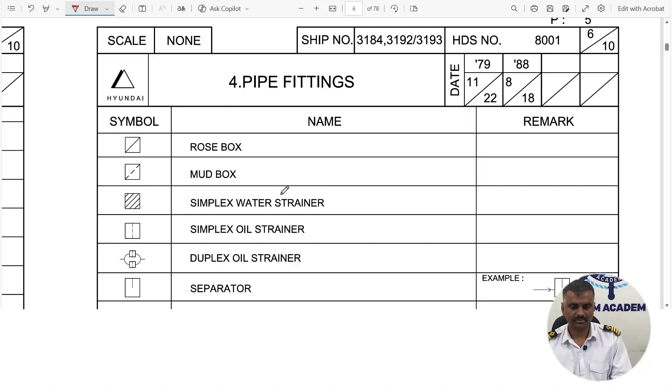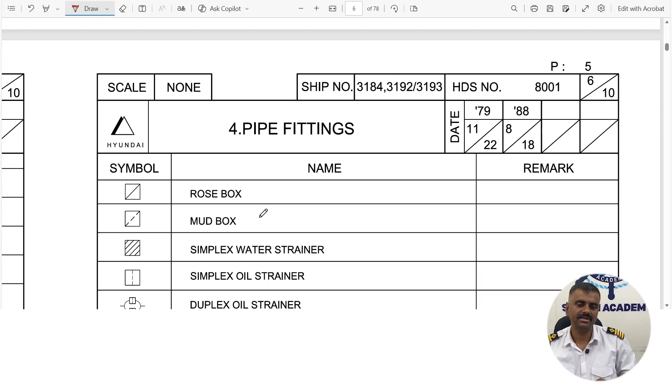So basically the purpose of these pipe fittings is, in the pipeline diagram there are separate fittings apart from the pipe, like you will have filter, you will have strainer, separator, hopper, orifice. These are fittings which enhance or increase the workability. So the pipeline is not just a single pipe, it is also associated with several fittings. So these are the few fittings that we are going to discuss in this section. As per the symbol list we will see one by one what these pipe fittings look like.

So here we see the number one symbol is rose box. So if you see a box with a single cross like this, that means it is a rose box. Let me show you how the rose box looks like. So this is how your rose box looks like. So basically it is a type of filter, and you can see the amount of holes in this. The size of holes is also big and the amount of holes is also big.

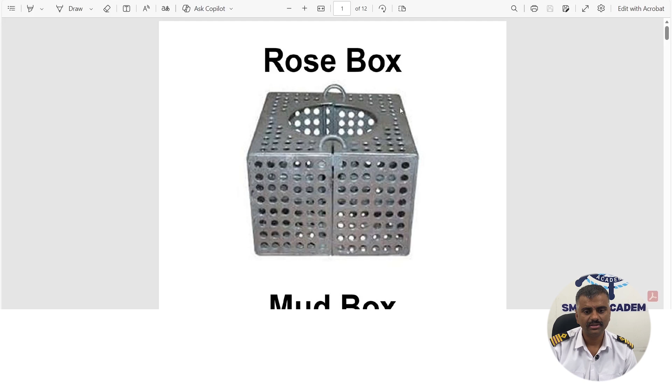So it is basically to retain the heavy particles or the bigger components like fish and all. So it can be used in the sea chest filter. In the sea chest you can use this kind of filters. So separate vessels will have this kind of rose boxes also. So if you find a single cross like this in the symbol list in the diagram, that means it is a rose box.

If it is a mud box, it can also be a mud box in your sea chest. So you will have a dashed line in between. You can see this is a mud box. Dashed line is a mud box. So this is what our sea chest filter generally looks like. So this is a mud box that we are using in the sea chest.

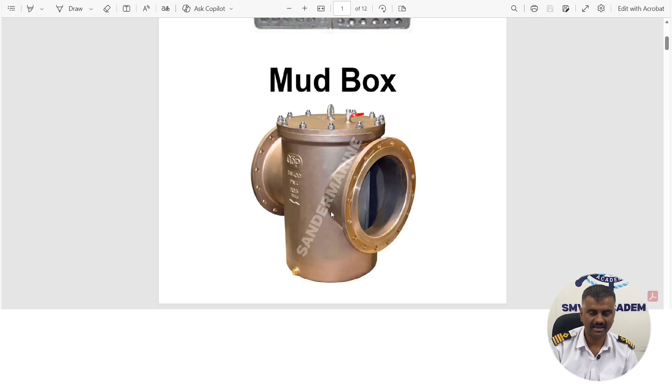The basic purpose is to contain the big components like fish or algae or whatever is coming in the sea chest. So basically that is a mud box. Both of them have bigger hole sizes. Rose box I have never ever seen in my career. You might be having it on board your vessels, but we are using mud boxes.

Then there is simplex water strainer. As the filtration level increases, the micron size reduces. It is shown by the number of dashed lines. So that will show that the filtration is more fine here. That is the simplex water strainer.

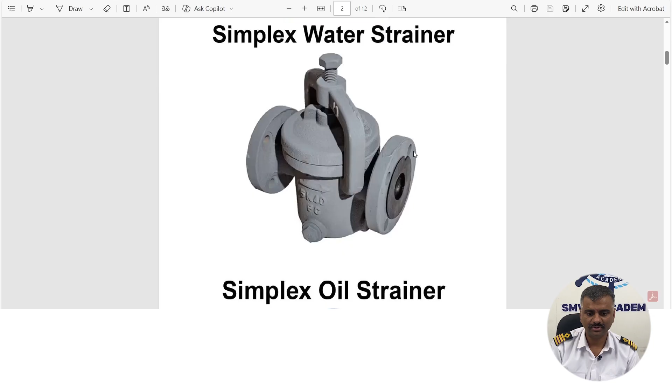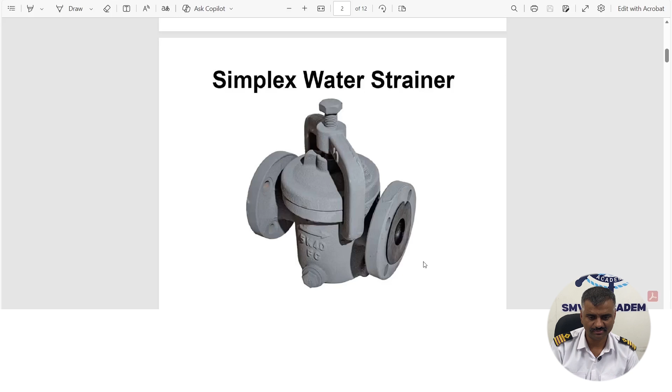If you can see, the general filter in the water line is a simplex or duplex. Simplex means one strainer will be in the line, you cannot do changeover for the strainers. So that is simplex. Any simple line filter that you will have is a simplex strainer. If it is a water line, this kind of strainer will be there, it is a water strainer. If it is in the oil line, then it is oil strainer.

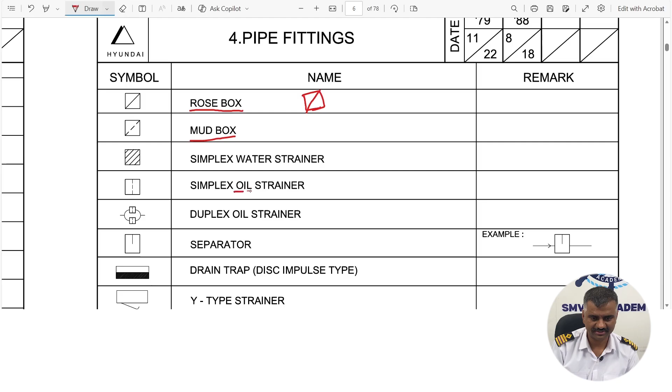The only difference is in the size of the filter microns. You can see if it is in the oil line, it is shown with a dash in the center. Center dash. So oil strainer. Now duplex oil strainers.

So oil strainers, both the strainers are shown here. There are two strainers and they are dashed out. Okay, so what you can do, you can use one at a time and change over to the other one, and you can clean out or carry out maintenance on the other strainer. That is a duplex strainer. You can see this type of mechanism.

You must have seen this in your boiler systems. Okay, boiler systems, your fuel oil systems, where you can change over to the other filter, because these systems have a tendency to get choked easily. And continuous operation is also mandatory. If you cannot stop the system, what you can do is you can change over the filter and carry out maintenance on the other one.

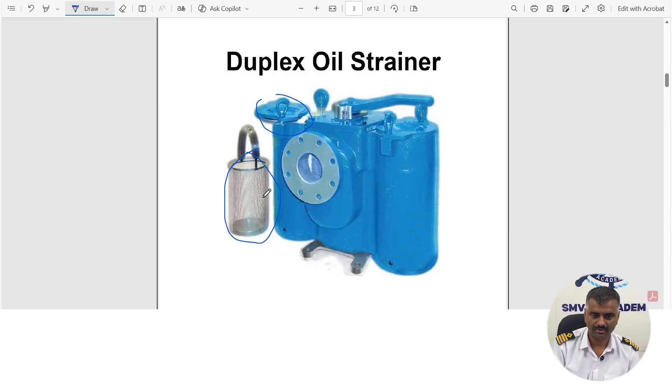You can see one is changed over to this side, the changeover valve is in this position, and the other filter is opened and the strainer is out. You can see this is how the strainer looks like, the filter looks like. You must have seen this in the boilers, auxiliary boilers, duplex oil strainers. Okay. So this is duplex oil strainer.

Then comes separator. Separator, basically given in example, is this one. So basically the separator can be of different types, like moisture separator, oil separator, drain separator. Okay. So the simple thing is that if it is shown like this symbol with a dash in between, that means there is a separator in the line. You can have it in the compressed air line, right, to separate out the condensate, or to separate out any oil in the line. So for compressed air line you can have separators. Any other refrigerant line also you have separators, refrigeration line.

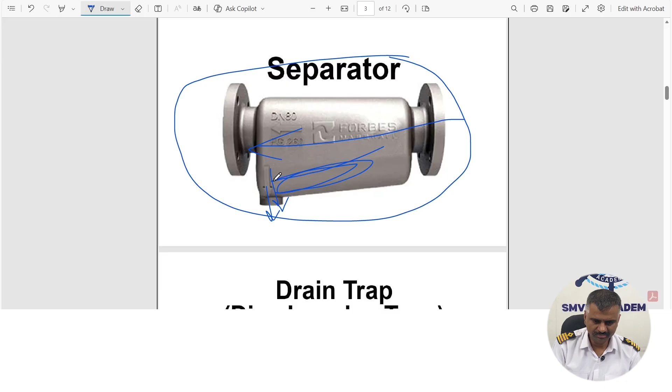So how does the separator look like? The separator will look like this. Okay. So you can see it is showing drain out from here, and this is how it is traveling from one side to the other side. Okay, sorry, the flow direction shown is this one. So this will be from this side to this side. Okay, the separator flow, and then whatever drain or moisture is accumulated here is drained out from this passage. So this is how a separator looks like. Can be used for moisture condensate, okay, or to separate out oil, etc. The separator is used.

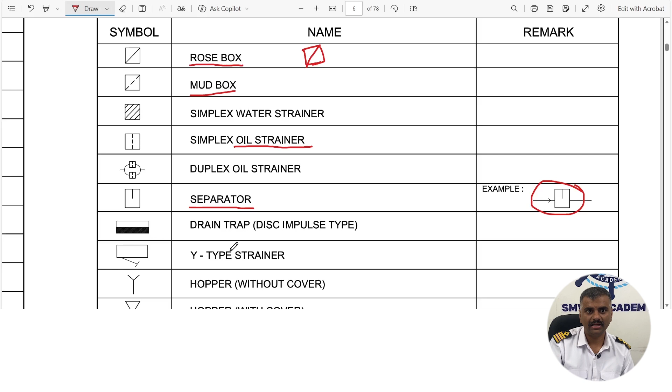Now comes drain trap. Drain trap is used in the drain line. Separators are used in the common manifold, in the common line. Say in the compressed air line you will have a separator, in the control air line you will have a separator, in the refrigeration line you will have a separator. Drain traps are used where the drain of the system is associated, like your steam traps. Steam trap is also a type of drain trap. It is in the outlet line. And the purpose is to let the...

So drain trap, you can see it is of disc type or impulse type. Here it is a disc impulse type. In the photograph you will see one is a disc type drain trap, the other is an impulse type drain trap. Basic funda is we know about the steam trap, no? So it's like that only. Steam trap basically purpose is to trap the steam and let the condensate go out. So similarly the drain trap also works on the similar funda. So this is how a drain trap looks like.

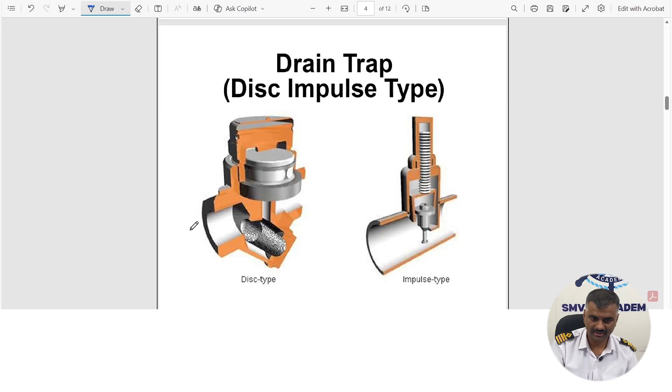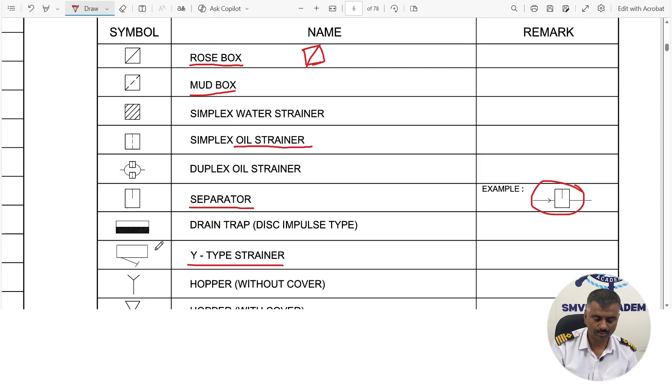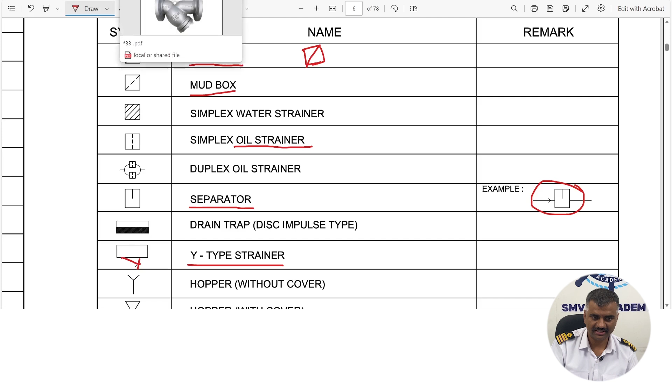Now the next one is Y type strainer. It is shown like this, you can see, with a box and T, okay, which makes it a Y. So by looking at the pipeline you can know that this is a Y strainer. So this is how a Y strainer looks like. In the water pipelines, small pipelines going to the purifier line, you will have these Y type strainers. Mostly in the control air line also you have Y type strainers. Okay.

Advantage of placing this type of strainer is that you don't need to open it up from the top and remove it. So if there is any pressure in the line or any drain is coming, you can just slack it from here. Pressure will be released downwards, not towards the operator, and any drain, condensate, moisture or oil content there can be drained out easily. Filter cleaning is also easy in this case.

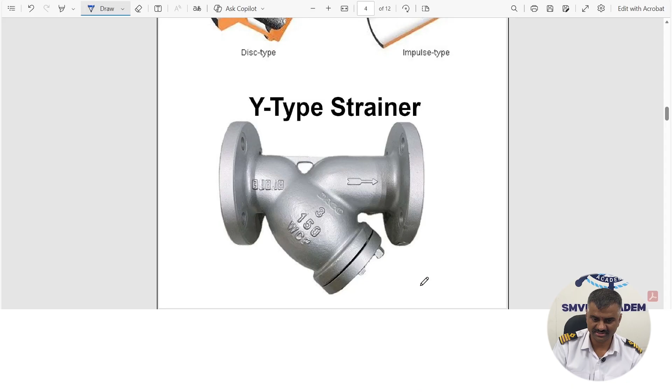So a Y type strainer is of advantage when you are operating a system and you can't always open the system for maintenance. You can just open this type of filter and drain out the condensate or any contents in the system, and it will not come to the operator side, it will go towards the downward side. That is the advantage of using a Y filter. So for a Y strainer, you will have a symbol like this.

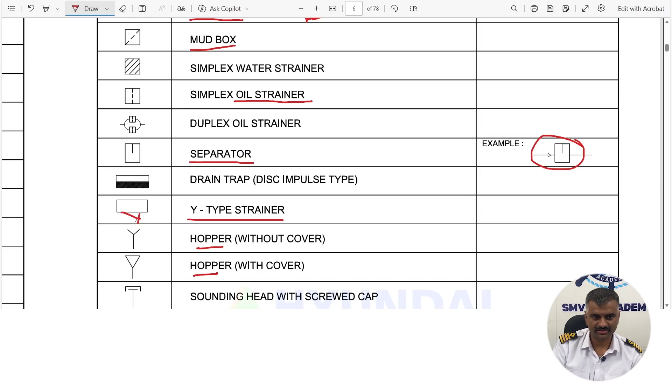It's a hopper. There is hopper without cover and then hopper with cover. Can you tell me, guys, where this hopper is used? Have you ever seen it on board? So hoppers, if you can see this photo, this is how a hopper will look like. Hopper without cover and hopper with cover. So the cover has been placed on the top; without cover also depends on the pipeline.

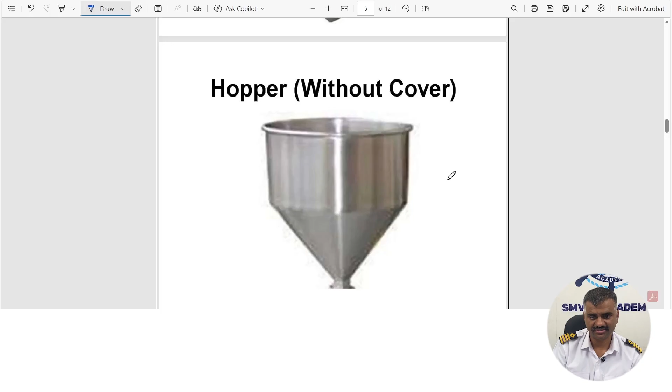Mostly you will find this in the turbocharger grit washing; you will use this type of hopper. Grit washing, or if you are carrying any washing etc. in the line, you will have this kind of hopper. So hoppers are rare to find, but in the turbocharger line, on the grit washing side, you will have these hoppers.

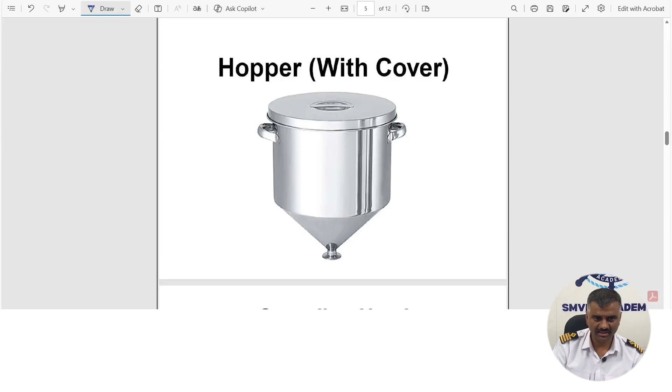Now this is the sounding head with screwed cap. So this is how a sounding cap looks like, and it is to be screwed. Basically, the purpose is that it will hold the sounding pipe and the contents therein intact; that is why it is screwed down in the pipe itself. It is not just a lifting type of arrangement, it is screwed inside the pipe.

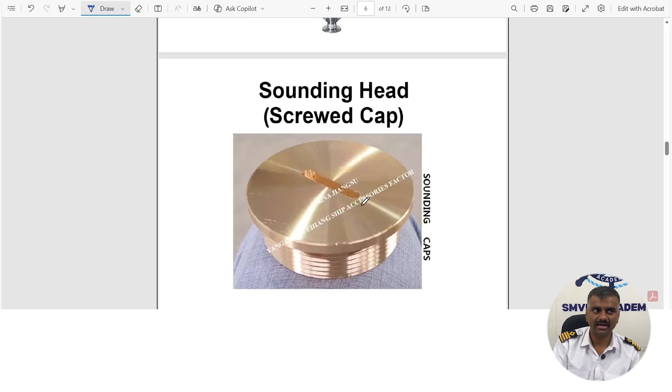And why is it done so? So that in case of any pressurization or excess pressure, it will not release the pressure from the sounding cap. If it happens, that means the cap was slack; it is a safety concern if this sounding cap is not tightened in place. Otherwise spill and overflow can take place easily. It will not rise from the vent, it will come out from the sounding cap itself. And that is why the next one is the sounding head self closing valve with test cock.

The symbol you can see here, sounding head with screw cap. So you can see this is the sounding head pipe, and there is a screw cap on the top. So that is what it resembles, the sounding head with screw cap on the top.

Second one is sounding head with self closing valve with test cock. In this one you can see the self closing arrangement is shown here. So why is the arrow given? The arrow indicates that there is a self closing arrangement. And there is one test cock also given; this small test cock indicates that. So why is the test cock given, guys, in the sounding pipe? It is below the line.

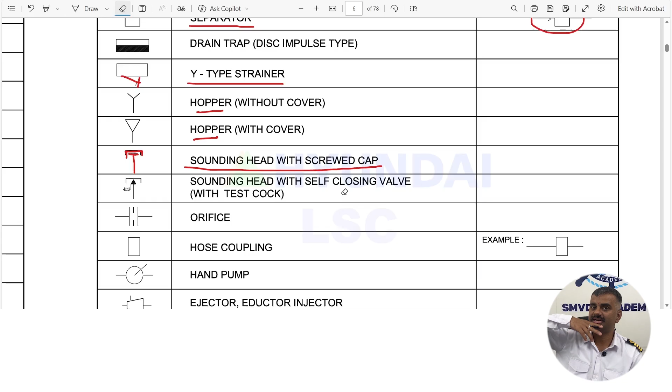It is below the self closing valve. Say the scavenge drain line is always pressurized. So how will you come to know whether you have closed the valve, and whether the valve is not holding? How will you check whether the tank is depressurized? Only then can you open the sounding cap and take the sounding, right? If you don't know that it has been depressurized, it will spill out every content from this scavenge drain tank.

Once it happened to me when I was a fifth engineer. The valve was not holding, and I did not check with this test cock whether it was depressurized or not. As soon as I opened the valve for taking sounding, it was pressurized, and the contents came out.

Okay, so we have to be very careful when you are taking sounding with the scavenge drain tank like that. So that is why they give a test cock. Okay, you can see in this photo also, this is the self closing arrangement. Other vessels might have different arrangement. This is a weight operated type self closing arrangement. Some vessels have a spring arrangement for the self closing.

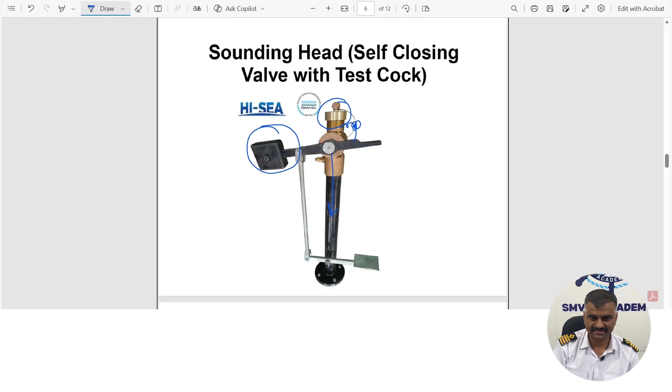Basic purpose is that even if the sounding pipe cap is not holding, this self closing arrangement will keep the sounding pipe sealed, intact. Okay, now if you have to take sounding, there is a test cock here. You can see this is a test cock. This is just like a spring loaded push button type, and there is a release hole here.

Okay, so as you push the knob from there, whatever contents in there will release from this small nozzle or small hole. From that you can come to know whether it is pressurized. If you are putting a finger on the hole and you come to know that there is a heavy amount of gas or heavy amount of pressure coming from there, that means the tank is still under pressure. No need to take the sounding now.

Check the valves whether it is holding or not. Maybe the valve you have closed is not holding. So always before taking sounding, please check these test cocks. Basically more on the tanks which are meant to be pressurized, like sludge tank, oily bilge tank, the scavenge drain tank. These tanks sometimes are pressurized, so you have to check their contents by pressing the test cock.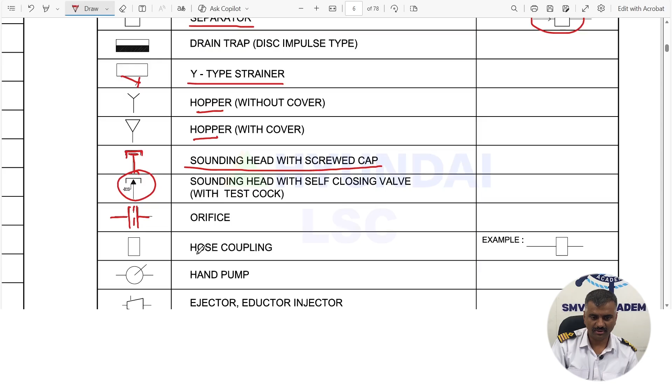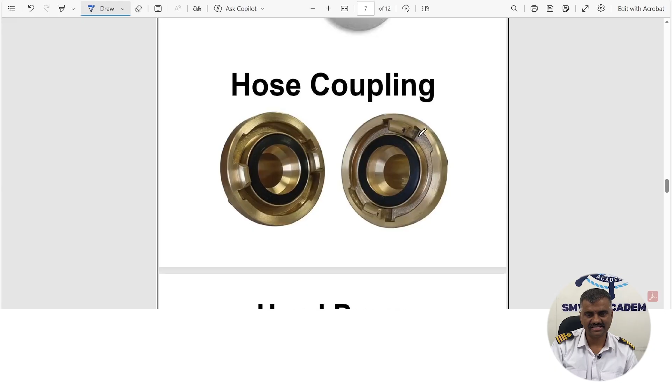Okay, now next is hose coupling. Here I have taken an example of hose coupling from the fire hoses. So basically what you see here, hose coupling is to close the fire hose, basically as a cover. Hose couplings are basically a cover for the fire hoses. Mostly you will find it as the cover for fire hoses, also in the hydrants. You will have these hose couplings to close the hydrants in the fire line.

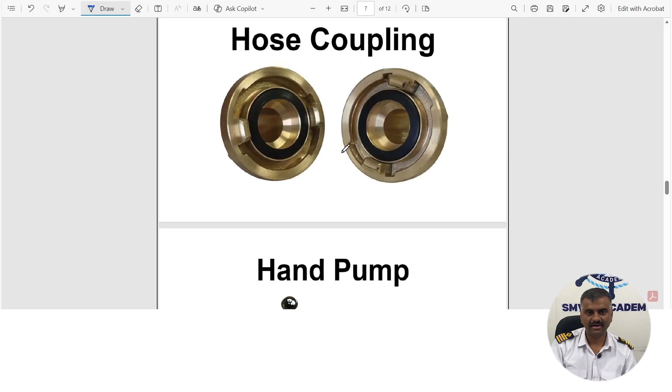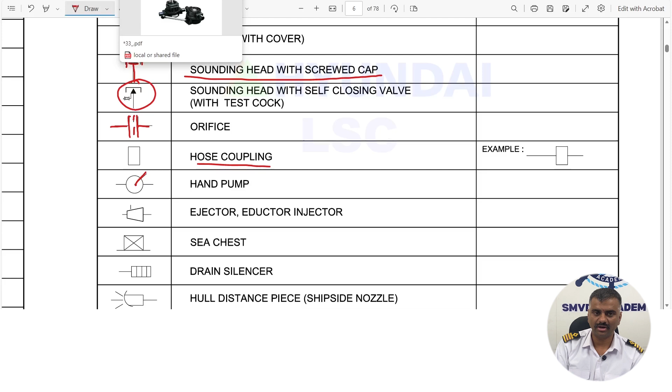Then there is hand pump. Okay, hand pump symbol is like one stick is shown, one arrow is shown like this in a simple pump. Okay, like this. So what does this mean? Hand pump means that you are going to pump the contents by hand, because the actual pump is not working. This is just a photograph of the hand pump, one side inlet and outlet, and you are carrying out the pumping operation by hand.

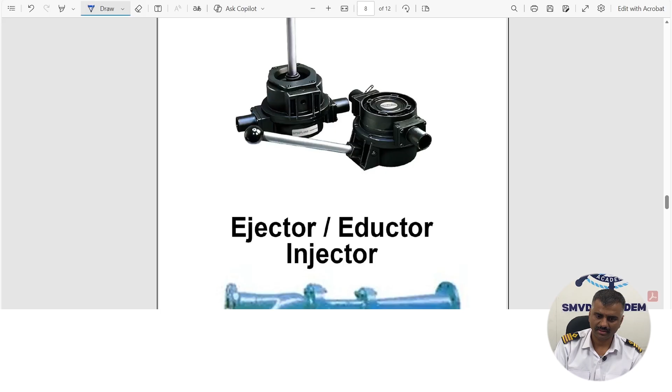Okay, where do you use it? Mostly you must have seen it with your lube oil priming pump. In the lube oil priming line, there is a hand pump given. Say your priming pump fails to operate, is not working, so your hand pump will become handy there, and you will have to use it.

In one of my vessels, I had to use this hand pump because the lube oil priming pump was not working, and every time during start and stop we had to pump the lube oil from the sump to the other components like bearings and all, because everything drains out.

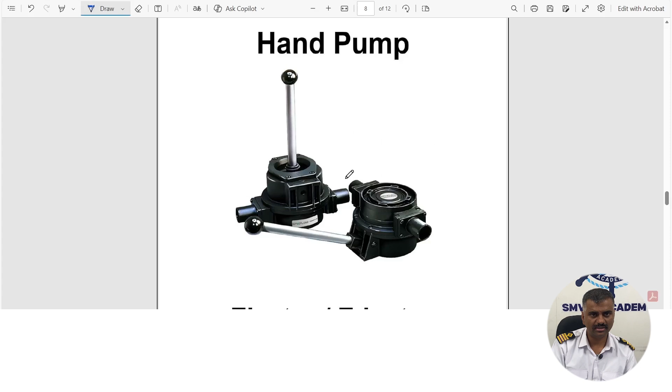So the lubricating oil pump, the pre-lube pump, was not working, so a hand pump was used there. In the lube oil line, etc., and other lines where the pumps are, you will find small hand pumps installed at numerous places. So this is the indication of a hand pump.

Then comes the ejector or eductor. Let me just tell you about the ejector. You can see it is like a divergent nozzle, it is expanding. So that is how an ejector looks, as you can see in this photograph.

This is from the freshwater generator ejector, to eject the brine and salt from the lower half of the evaporator section. From the shell we use this ejector. So basically it is to extract out the gases and brine from the freshwater generator. That is the basic purpose of the ejector.

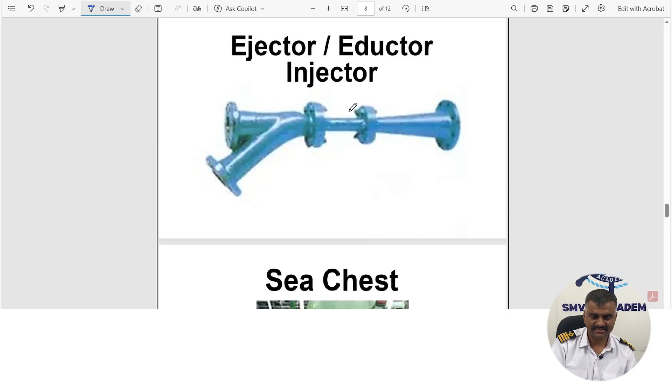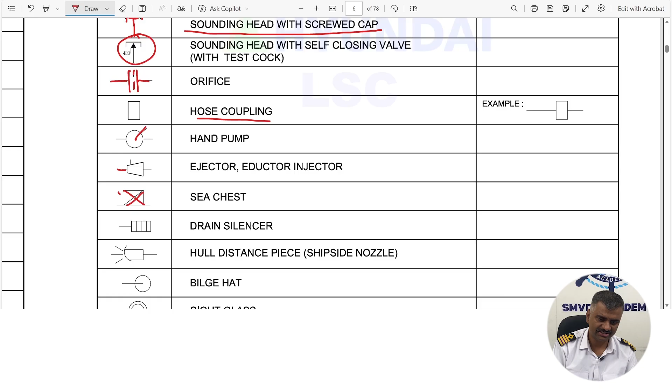Then comes the sea chest. We are all aware of the sea chest: low sea chest and high sea chest. You will always find a cross like this in the box for the sea chest. If you see the photograph here, I have taken it from a real onboard sea chest. The question to you is whether it is a high sea chest or a low sea chest. By seeing, how can you tell?

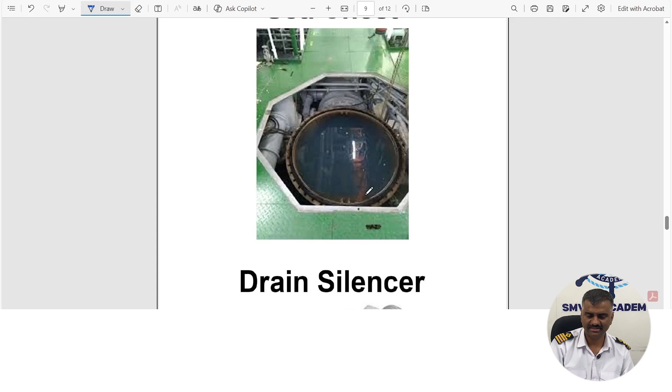Judging by the position of this sea chest, this one is a low sea chest because the position is on the lower side. The high sea chest will be a little bit on the upward side and towards the bulkhead, and the low sea chest lies down, just beside the main engine, near the center side. So that is the low sea chest.

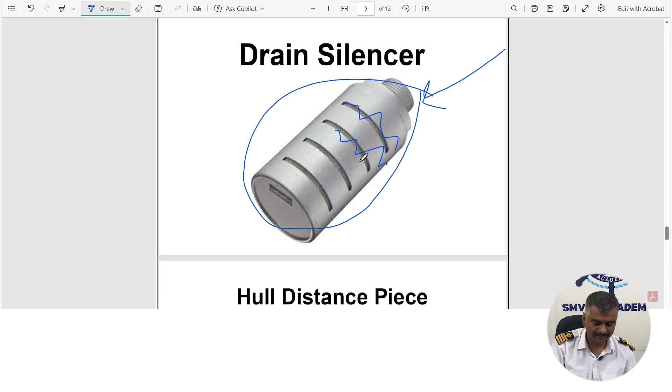Then comes the drain silencer. A drain silencer looks like this. The purpose is, say in the air compressor or any such equipment, control air line where you have drains and loud noise is expected, sometimes the maker or the owner recommends putting a drain silencer. There are wire meshes in stages fitted in the drain silencer. Whenever air or liquid flows from the top, it reduces the pressure fluctuations and silences the drains, and the contents are easily removed from the drain silencer.

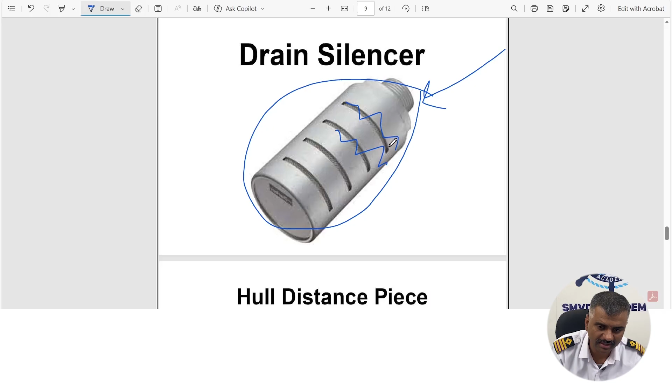So basically the purpose is to silence the drains, so the sound will be attenuated because of the layers of wire mesh inside the drain silencer. This is very common, and that is why in the drain silencer symbol you have many dashes, showing the layers of sound attenuation in the silencer.

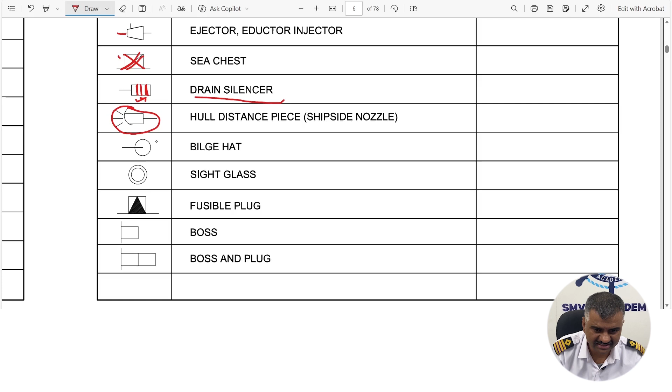The distance piece is given because if the valve is directly attached to the hull and the valve gets damaged, you don't have any option. If some perforation or damage happens in the distance piece, the valve can be closed, further water flow can be stopped, and maintenance can be carried out on the distance piece. But if the damage is to the valve itself, you can't do anything. So the distance piece is additional protection for the pipeline, given at the end towards the suction side.

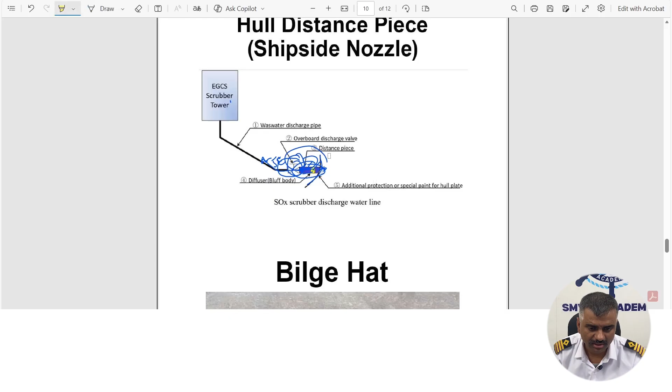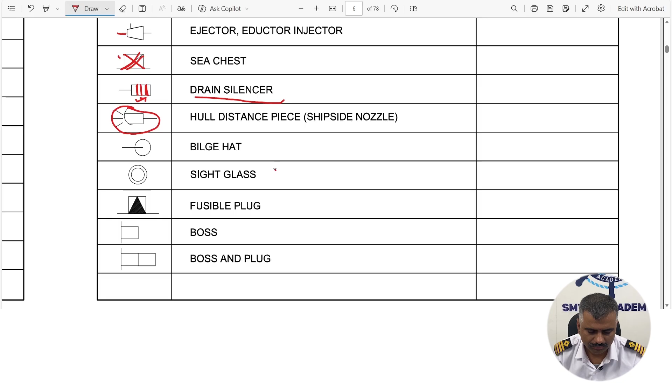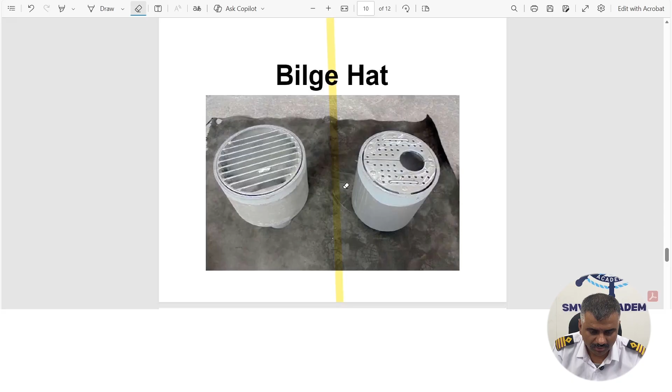Okay, now the next one is the bilge hat. Let me see what the bilge hat looks like. This is just a sample photograph of the bilge hat. Basically, what do you mean by bilge hat is, in the bilges, forward or aft bilges, we have got covers like this. You must have seen gratings or covers like this. These are the bilge hats. These gratings or covers can be lifted so the bilges can be seen. They are covering the bilges so that anything does not fall into the bilges, and they are covered up.

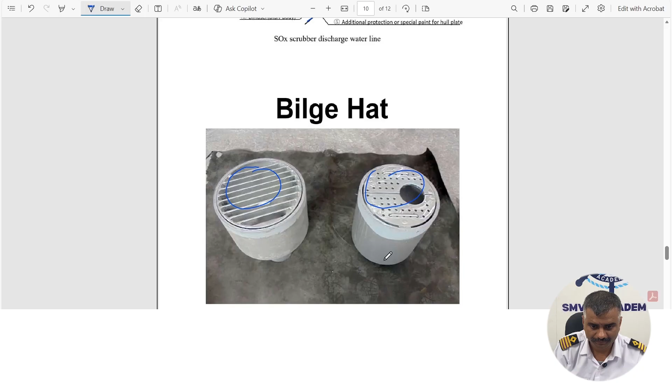Then is the sight glass. You can see this is the sight glass, where you can find the sight glass in most of the locations. In the boiler you will find the sight glass, in the overflow line you will have the sight glass, and it is very important in the overflow line, because from the sight glass you will know whether the tank is overflowing. You will also have sight glasses in the freshwater generator. So many numerous locations have sight glass.

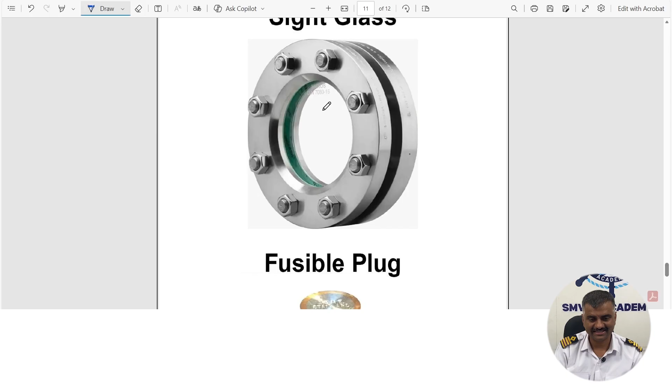It is very important. I remember one incident from one of my vessels. A new fourth engineer had joined, and we had recently opened the freshwater generator for cleaning. At that time we had also removed the sight glass, and while tightening he tightened the bolts in the wrong manner, and the sight glass cracked, and we did not have a spare. So for a few days the freshwater generator was not running. We tried to manage with some other glass, and then we got a new glass and could use it. So it is very important to carry out the maintenance in a correct process. For juniors who are listening, please be careful while tightening the glass. The glass cracks very easily.